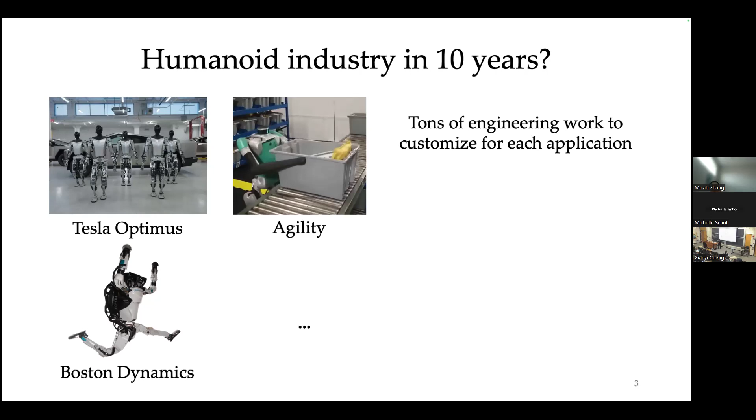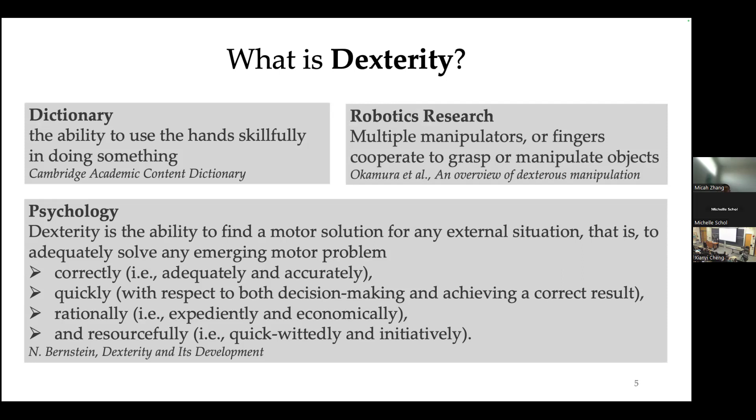So to me, dexterity is the autonomy in manipulation. Consider an analogy to autonomous driving, whose goal is to fully automate driving in cars, where it could encounter a lot of different emergent road problems. The goal for robot dexterity is this full autonomy in manipulation. But the autonomy in manipulation is going to be much more complex than autonomous driving, because thinking about our hands and arms, the action space is actually much higher dimensional compared to cars. And also, in manipulation we need to physically interact with the objects. In comparison, in autonomous driving there's no need to physically interact with, for example, a pedestrian.

But the potential of robot dexterity is not just about households. It's also about revolutionizing many different industries. There are a lot of manual processes in manufacturing, construction, warehouse, space operation, recycling, and so on. But right now, all these industries are having some labor shortage. So in this talk, I'll provide some new perspective on robot dexterity, and hopefully after this talk you'll be able to see more connections among these very seemingly different tasks.

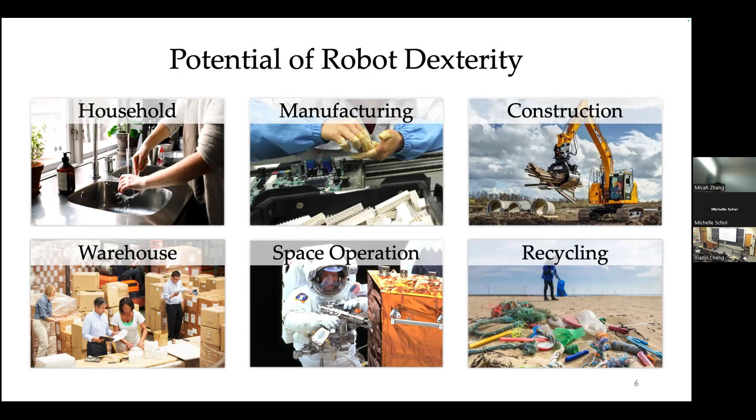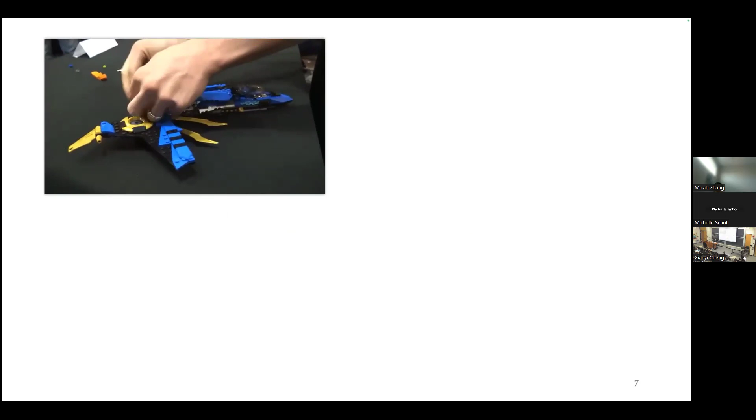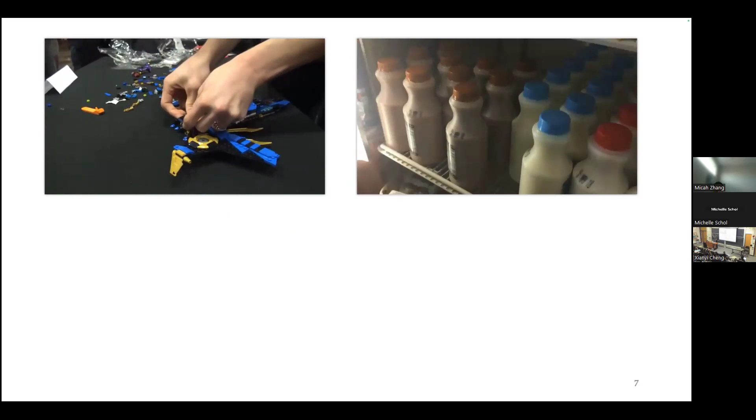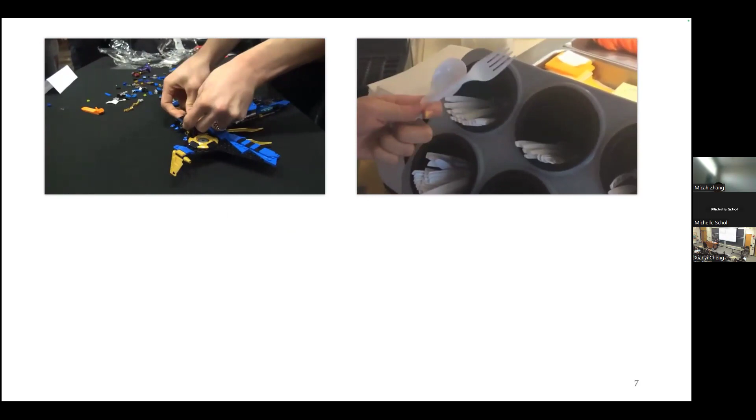So let's look into a bit more about human manipulation, human dexterity. Here you can see this person is very reactive, very fast, and very robust in manipulating these tiny objects. This is just a person trying to pick up items in the grocery store. You can see for these simple tasks, there are a lot of complex hand motions, a lot of complex object, hand, and environment interactions. This is just a single task.

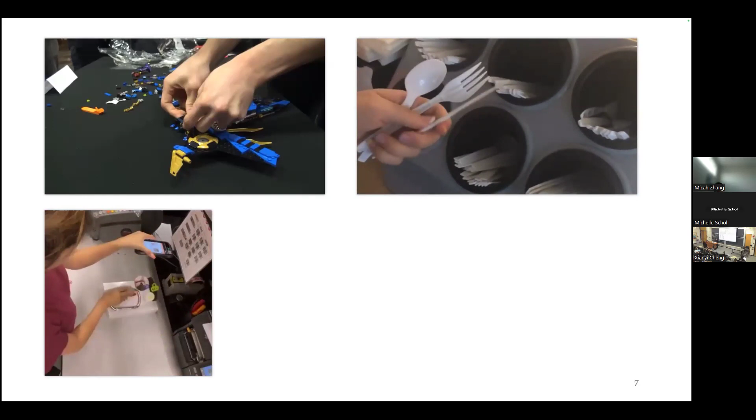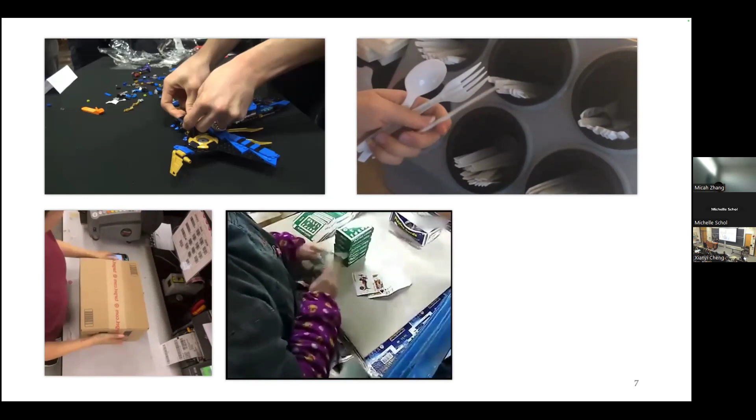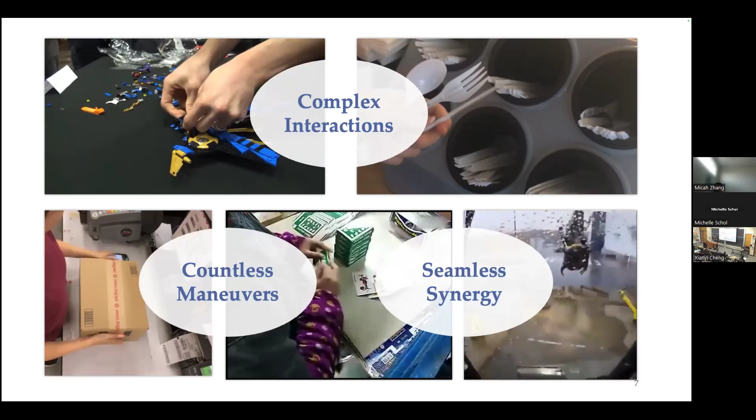So we can see a lot of complex interactions, countless maneuvers, and seamless synergy in human manipulation. In our robotics research, we only understand a very small part of dexterity. A lot of times we assume that we need to have a dexterous human-like hand, robot hands, in order to have dexterity.

I believe most of you have seen the OpenAI Rubik's Cube thing. So a lot of us believe that dexterity is about manipulating things within the hand. But if we look at these examples of human manipulation, from this excavator example, it's using a very simple tool to do very complex tasks. So dexterity is more from the intelligence inside the excavator, which is the human mind.

And from this packing example, we can see that it's not just about reorienting things within the hand. There must be more complex, smart strategies rather than in-hand reorientation.

So how do we move from our current understanding to this more general dexterity? I think it's important for us to answer more fundamental questions about dexterity. From my research, I'll provide some answers to the three questions below.

Our first question - I think the question is not as simple as it seems. I think it really encouraged us to reflect on what dexterity is truly about. So dexterity is not just limited to anthropomorphic hands. Even very simple end effectors can also have dexterity, like shown here from this excavator, from just very simple tweezers, or just from these chopsticks.

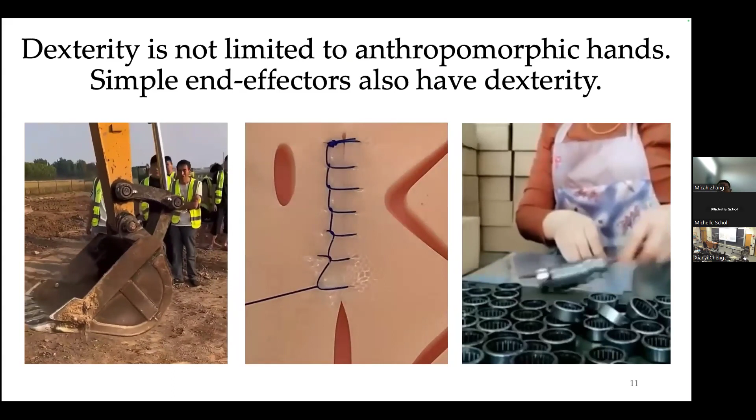So you may ask this question: why do we want robot dexterity beyond anthropomorphic hands? Why can't we just build human-like hands and let them do everything in different industries and in our households? I think the first point is that it's just like why we invent tools - we want to extend the physical capabilities of robots.

We want robot manipulation to have higher precision, to do heavy-duty tasks, or to even have better performance in scenarios that aren't naturally suitable for human hands. And we probably also want better cost efficiency. Human-like robot hands are extremely expensive and very hard to maintain.

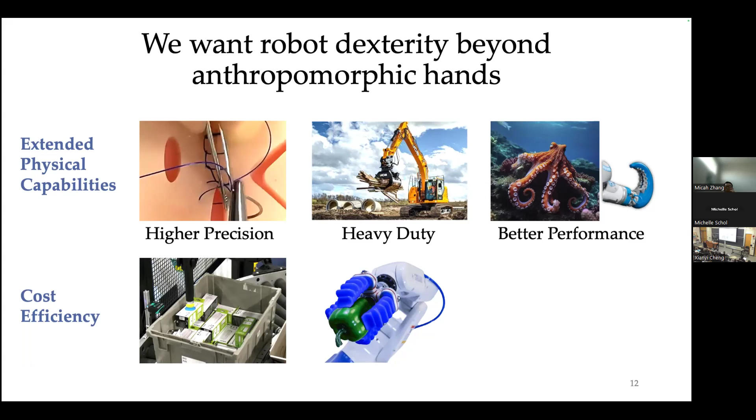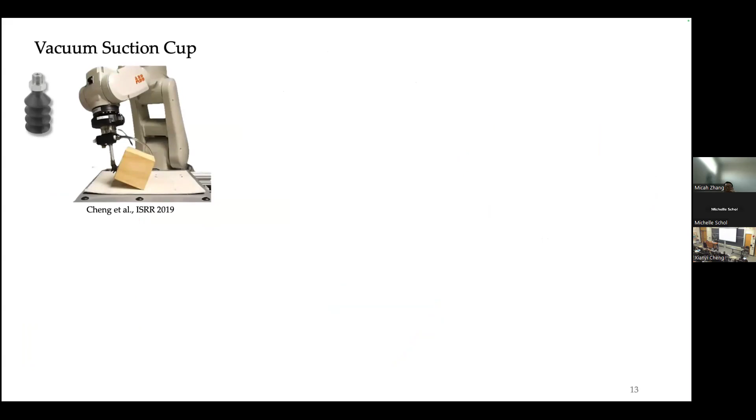But in industry, what we're using are suction cups or very cheap pneumatic robot hands. Imagine how much we can do by having dexterity in these simple end effectors, and how much we can save. So in my PhD research, I have demonstrated dexterity in several different robots: a vacuum suction cup, a rubber ball on a rod, a parallel gripper, a 4 degree-of-freedom direct drive hand.

This hand has 2 fingers, and each finger can move in X and Y. And also an array of delta robots - this is just an array of very small robots, and each robot can move in X, Y, Z, but their range of motion is very small, so they need to collaborate together to do any manipulation.

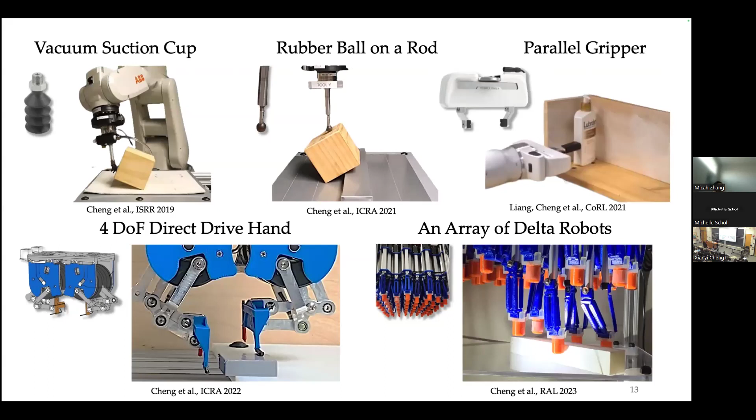So let's push things to the extreme and say, okay, the simplest robot end effector can have dexterity. This is a rubber ball on a rod, so it has 0 degrees of freedom. But I've demonstrated that it can also have some dexterity by pushing something onto the wall or getting an object through an obstacle.

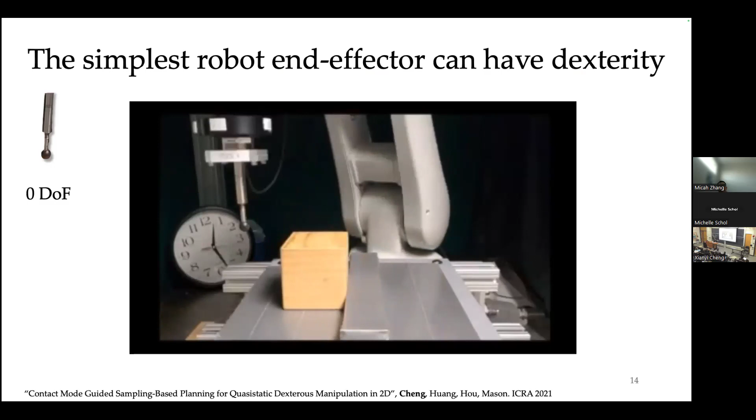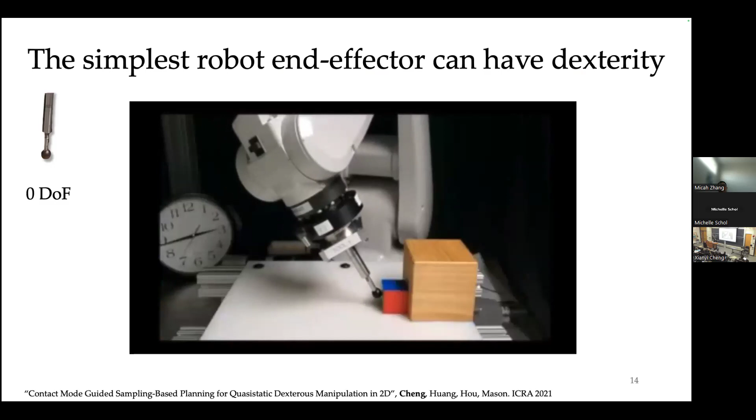And the next thing is that if we add some passive degree of freedom on the bellows and also some vacuum suction force, we get the simplest robot gripper that is mostly used for pick and place in industry.

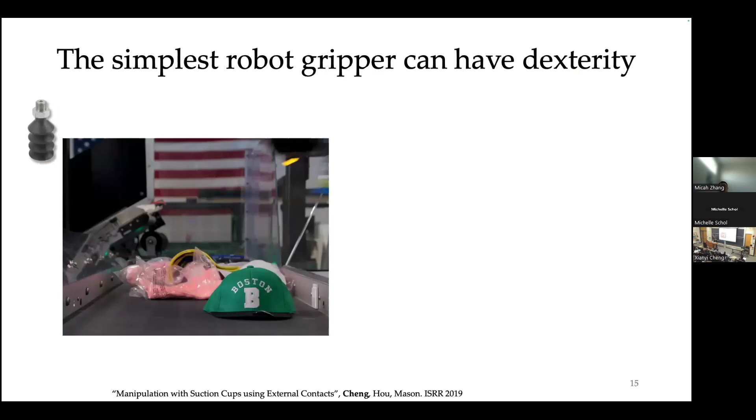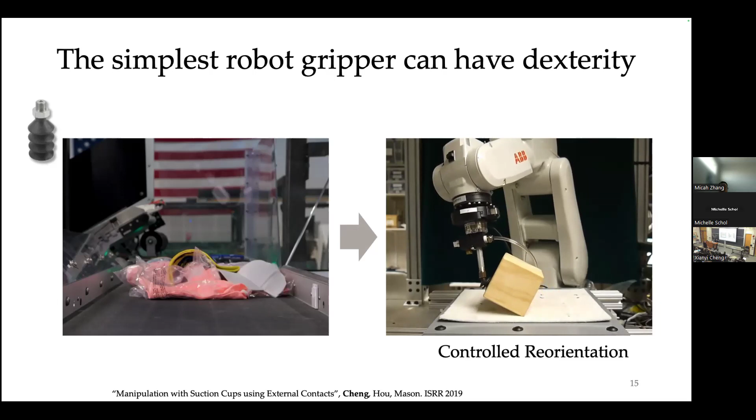But here I show that it can do controlled reorientation. In fact, for example, this object is too heavy to be picked up, but we can still tilt the block without picking it up with the help of table contacts. So it's really extending the robot's capability.

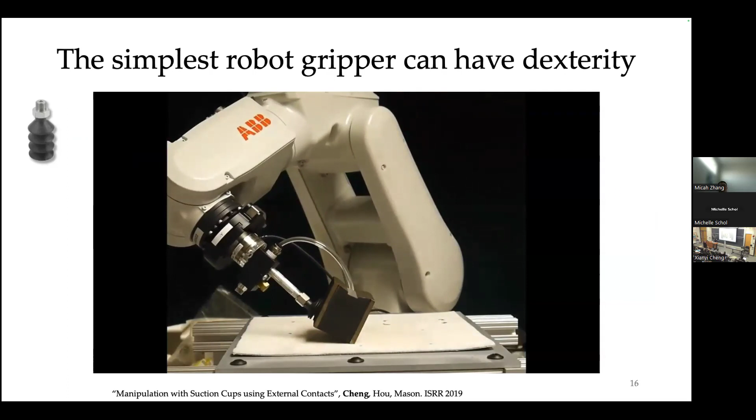I have also developed an optimal control pipeline where we can intentionally use the finger deformation to minimize the robot motions so that the robot will not go out of its workspace. So this is the dexterity for the simplest robot gripper, and we can imagine it having more future applications in industries like warehouse automation, where we can, for example, move and pivot things around in order to pack things.

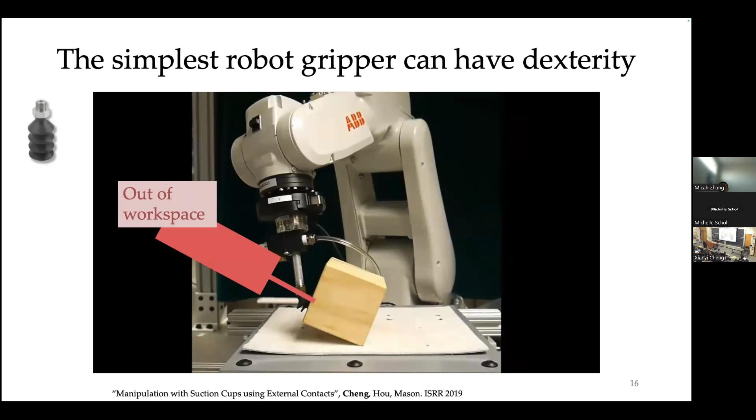And obviously, a slightly more complex robot hand can also have dexterity. This is the direct drive hand. This object cannot be directly picked up because of occlusion from the environment, but it can still have dexterous strategies, for example, first pivoting this object and then doing some dexterous finger maneuvers.

to grasp the object. And this is just a simple parallel jaw gripper. You can see this shelf environment is pretty occluded, but it's able to figure out a sequence of motions in order to get the object to its goal pose.

And also these small delta robots, they are able to collaborate together in order to reorient an object. I'm using the same algorithms to automatically generate the motions for these different robots, and I'll cover more technical details in question 3.

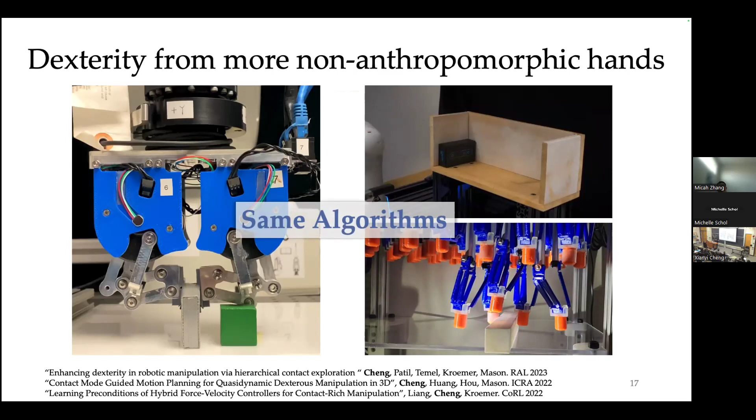So coming back to our question, what robots can have dexterity? My belief is that dexterity should be the motion intelligence that in the future all of our robots should have. I'm putting a question mark here because we cannot have any rigorous proof about that, but I want to use this as a thinking point: robot dexterity should be greater than human hand dexterity. It can be inspired by, but go beyond, human hand capability.

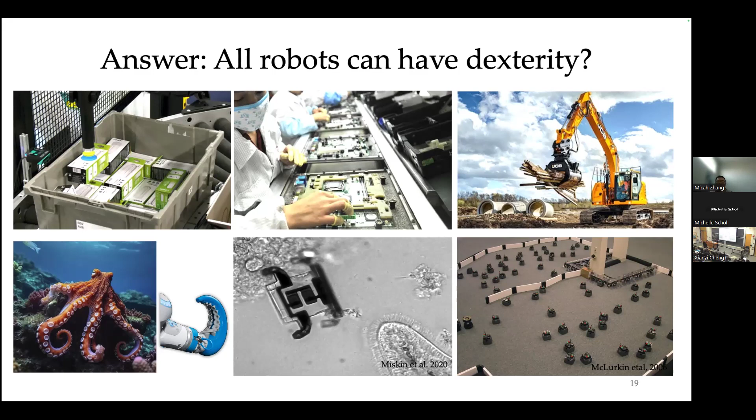If we want to enable all robots to have dexterity, then it must not be just about manipulating things within the hand, doing in-hand reorientation. So what should be considered beyond robot-object interactions?

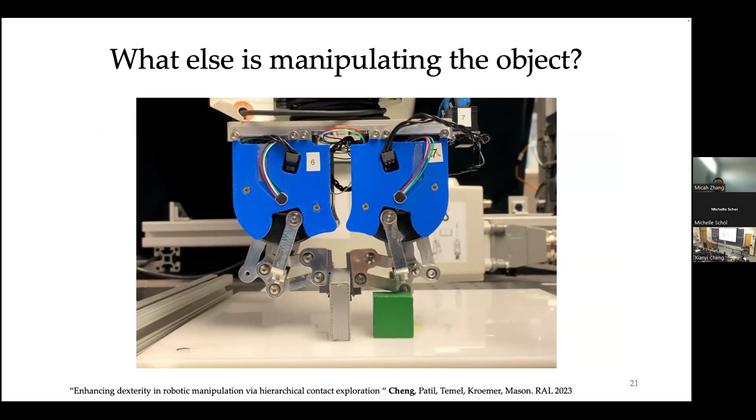We can call this the environment. It's actually very necessary for us to not just think about in-hand manipulation, but also consider the object-environment interaction in manipulation. So why is that?

The first thing is that the environment is the blocker for the robot. You can see that if the robot wants to grasp this block, it is actually occluded by this green block and this table, so it cannot achieve a direct grasp.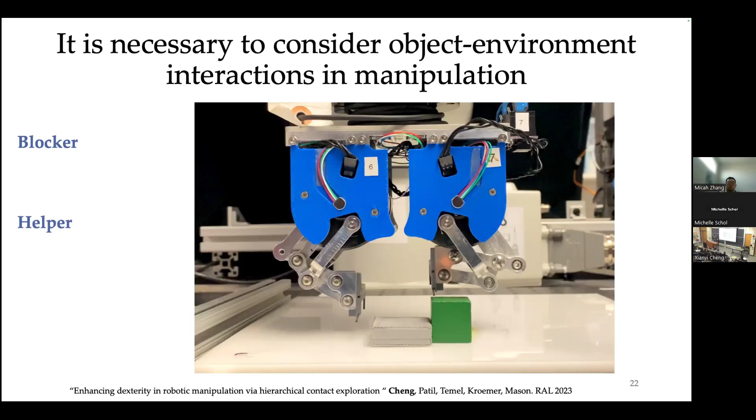And the environment can also be a helper. So for the blocker, the environment is the obstacle for the robot. But for the helper, the robot can actually use the environment in order to pivot this object, in order to achieve more dexterous, more clever motions to grasp the object.

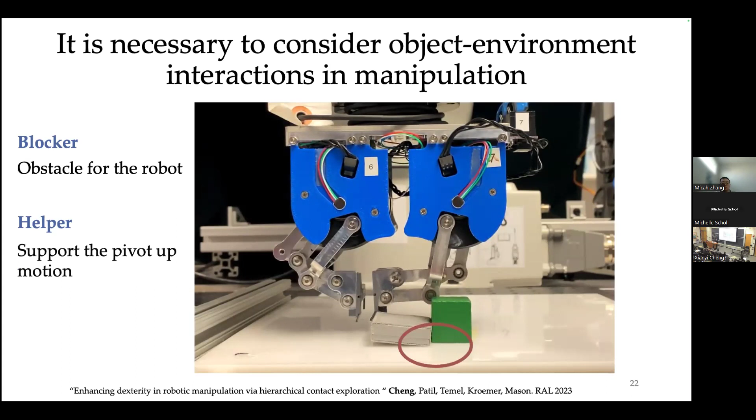So here are some more examples of this direct drive hand using the environment to achieve previously unachievable goals. For example, this bookshelf is obviously occluded, but it was able to figure out the pivot motion on the bookshelf and then rest it there and then grasp it. So you can see it's really using the environment.

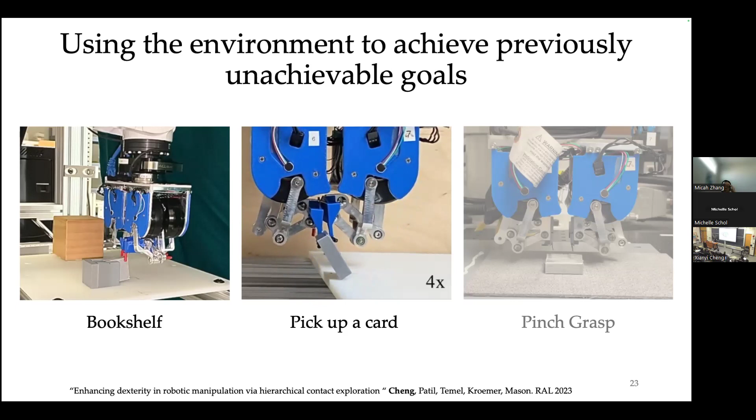And also pick up the card by sliding the object on the table first. And then this pinch grasp by first pivoting this object in order to grasp it on its short edges.

So to answer our second question, it is really important for us to consider the environment contact interactions of the object in order to achieve more general dexterous manipulation that's more than in-hand manipulation.

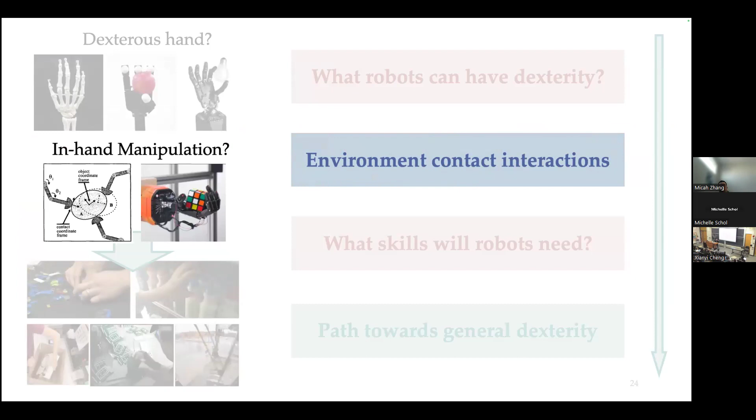So considering all these complex contact interactions and all these different robots, what skills will our robots need in order to capture dexterity, in order to capture that complexity?

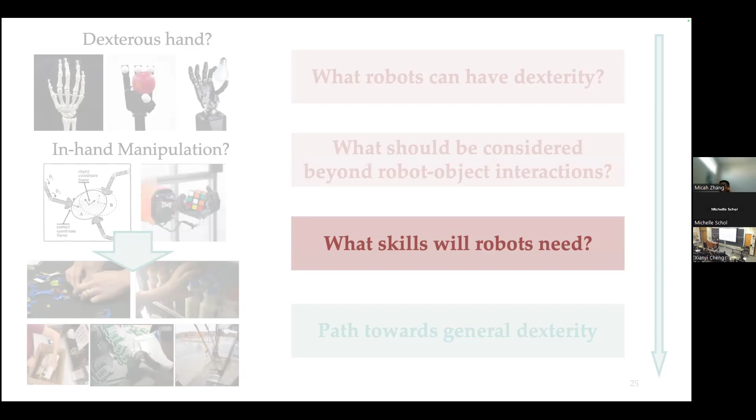Our first question is: can dexterity be fully captured by predefined skills? A lot of our robotics research considers that we can predefine different skills. They can be, for example, hard-coded, or they can also be learned from our observation of different trajectory shapes. Normally we can sequence them together in order to achieve a task. I think it's completely fine for many different tasks, but can that capture dexterity?

So we have several options. The first option is that we can probably predefine some high-level skills like pick and place, push, and pull, things like that. But here I'm going to show some videos for the picking skill.

So you can see that it's very, very different. The trajectory for each picking skill is going to be very different, and the contact interaction is also very different. So if we're defining high-level skills for dexterity, we still need to plan these dexterous motions within each skill, which actually does not fundamentally solve our problem.

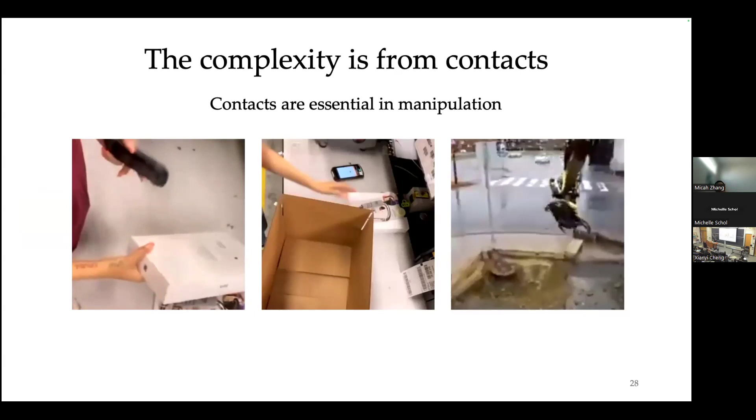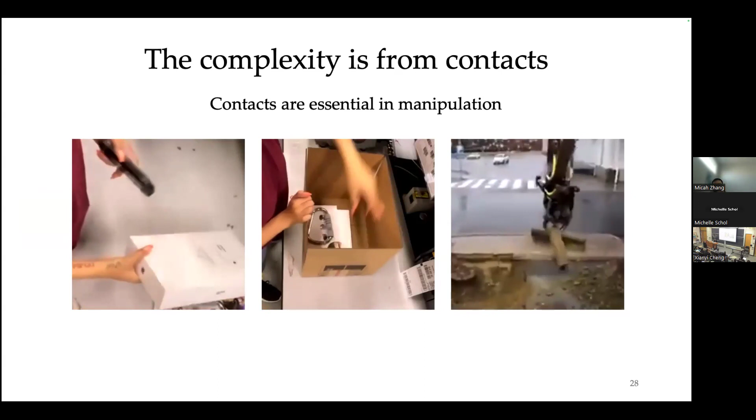If you look at these examples, you can see there are a lot of changes of contacts - object environment contacts, hand object contacts - and they are actually quite complex. The changes in these motion trajectories and the changes in the system dynamics are all caused by the changes of contacts. Imagine there are so many different ways for the hand, for the object and the environment to make contact with each other. There's perhaps this combinatorial explosion of these different ways of contacts, and that's causing these seemingly numerous low-level skills we have seen.

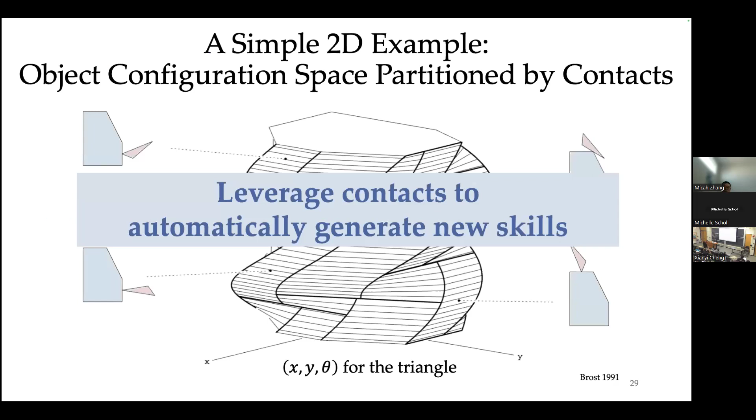But a nice thing is that a challenge could also be an opportunity. What I've done in those algorithms is leverage contacts to automatically generate new skills. A one-sentence summarization is that we use contact modes as auto-generated low-level skills. I'll explain what contact modes are in a second, but basically, by using these contact modes, we're looking at the local information for these small facets, and then use that local information to guide the generation of different skills.

So what is a contact mode? A contact mode basically describes the transition of the contact states in the system. For example, we have two contacts here marked by the black dots. Each contact can have the mode of separate, fixed, right slide, left slide. Here are some examples of the motions corresponding to different contact modes. These are not all the possible contact modes for the system, but you can see they already represent some diverse motions for the object.

Similarly, we can also have contact modes in 3D. It's slightly more complex, but we're essentially looking at the space for the contact velocity in order to distinguish the modes. In this video, the purple arrow is for the contacts that are separating, and the yellow arrows are for the contacts that are maintaining. You can see that they can actually represent pretty rich contact motions, rich object motions under different dynamics. This is also some contact modes for the hand and the object.

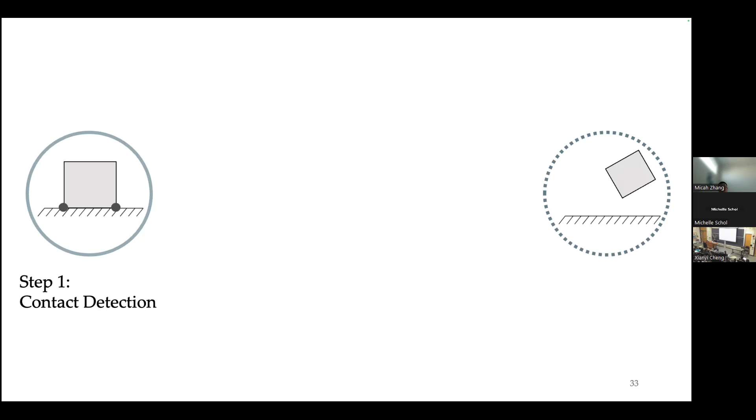After we've detected these contact points, we can do our contact mode enumeration and get all these different kinematically feasible contact modes. Then for each contact mode, we can sample a feasible robot action, in our case sampling robot-object contact points. Here's an example of sampling one contact point for a right slide. We'll do a feasibility check on the sampled points, and we'll see that in order for the object to slide to the right, we have to make contact on, for example, this area instead of that area. So we can do a force check to reject a lot of infeasible samplings.

And then, given the robot action, we can do something I call projected forward integration. It's basically about integrating the object motion as close to the desired sampled pose as possible. So this is for separate, and this is for the right slide, separate, fixed, separate. A lot of times you'll see that they cannot exactly get to the new pose, but still we can have diverse motions being generated using contact modes.

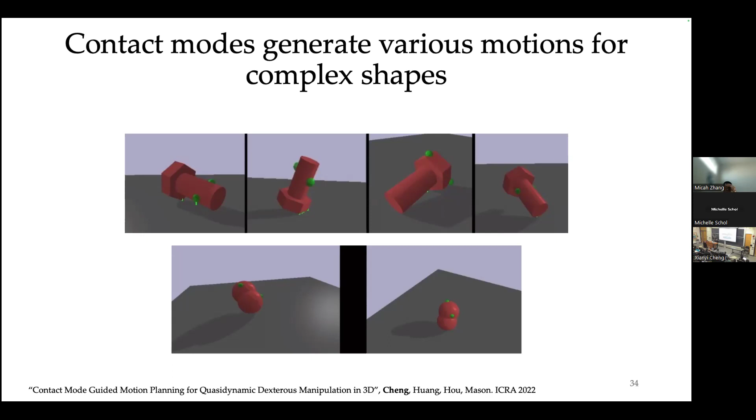So then we can combine these contact modes with the power of search and planning. We can combine these locally generated skills with contact modes with a more powerful global exploration, for example rapidly exploring random tree. Intuitively, it can randomly sample a new pose in the object configuration space, then use this random pose to find its nearest neighbor, and use these modes to generate many different skills. Some skills will be successful, some will not, but we can run this process iteratively to grow the tree and do the planning to get the object from its start pose to the goal pose.

Interestingly, we have proved that a 2D version of this random tree algorithm is probabilistically complete in our given problem scope. It means that for our given problem scope, the probability of not finding a solution to that dexterous manipulation problem will be close to zero as time goes to infinity.

Intuitively, it means that given our problem scope, we can use these contact modes to gradually explore the whole space of dexterous manipulation. One more thing to mention is that our problem scope for this proof is 2D manipulation and quasi-static manipulation with rigid body, with a single rigid body as the object.

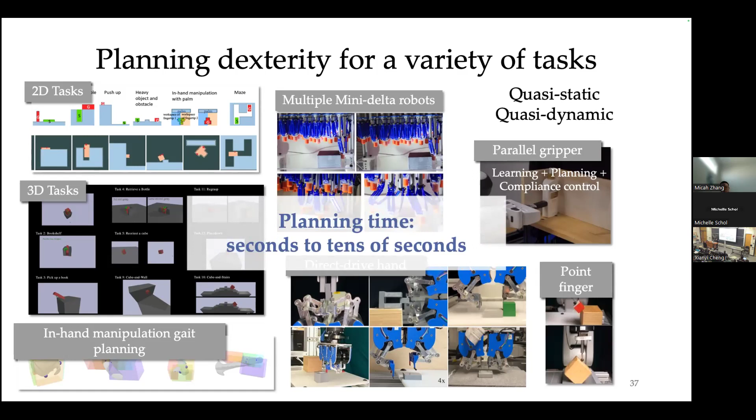I'm not able to show you all the videos for these planning tasks, but I'm going to share some of the most interesting takeaways from my experiments. First, although we don't have prior information about human manipulation, these planners can generate strategies similar to human manipulation. For example, for this unpacking task, a similar human strategy is sliding the object against the wall to get it up. Also with this bookshelf problem, this is a similar strategy to human manipulation, and also like picking up a book.

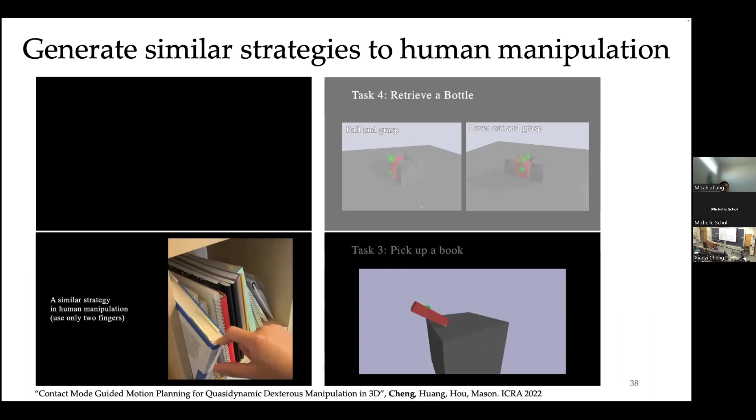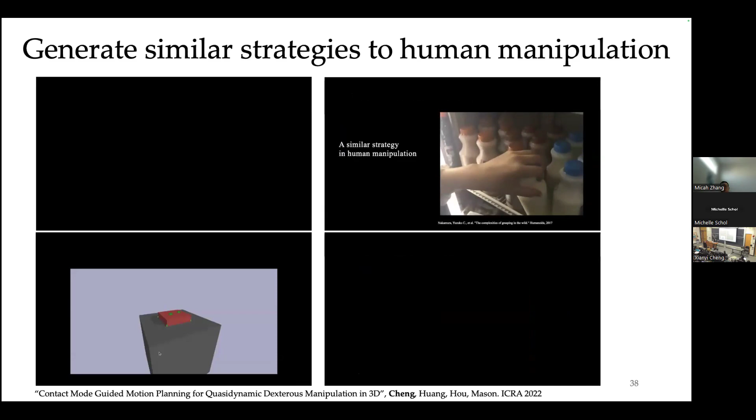Retrieving a bottle - that's the grocery experiment I've shown. I think environment contact guided manipulation is actually very common in human manipulation. By using this information about contact modes, we can have robots leverage the environment as an effective tool for manipulation.

There's also some smart strategies that are less commonly seen in human manipulation. Here's a quiz for the students: this is the upward peg-in-hole problem, where this is our start, this is the goal, and the green dots are finger contacts - we don't want the finger contacts to collide with the hole. So what would you do? Any thoughts?

Remove the hole? No, you cannot move the hole. The hole is fixed.

One thing is that if you release the finger, the peg will fall down. So how would you push that in? Slide - but if you slide it, you'll lose support on this side, right? Yeah, it's on the side. Bingo, I think both of your solutions are really good, it's just that we're not tackling dynamic manipulation yet, so this is my fault. But this is actually what the robot is doing, exactly as you just mentioned - but you can see the robot spent about 10 seconds to figure this out.

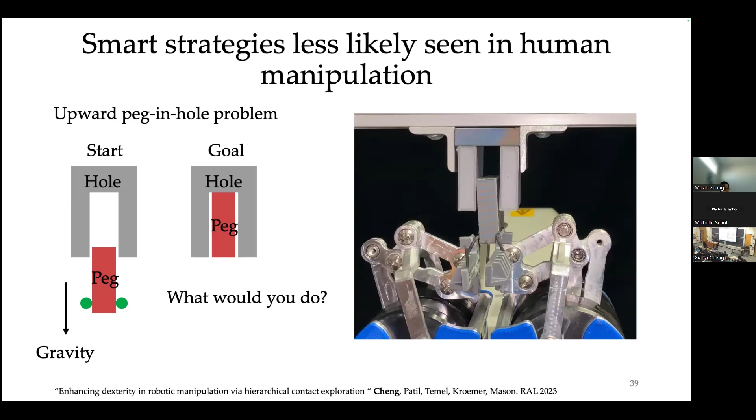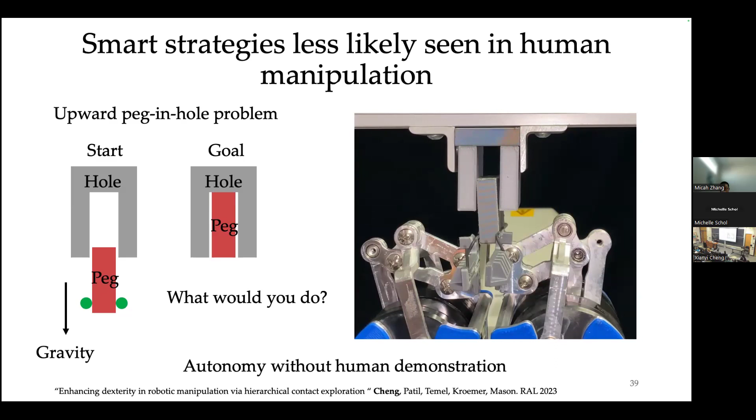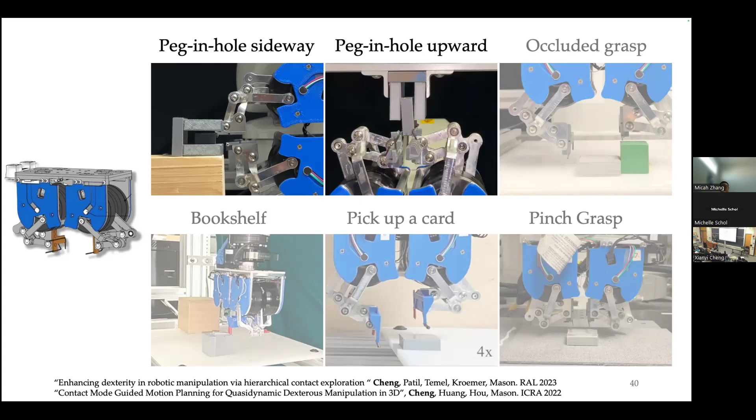We can definitely see that this scenario is less likely seen in human manipulation - even as humans we still need some time to figure this out. What I think this shows is some autonomy without human intervention or human demonstration. Here's the peg-in-hole sideways problem - you can see this time it does not need to press against the hole, it can just let it rest on the hole and on the other finger. All these experiments you've seen are generated using the information of contact modes.

There's also some robustness with force and compliance control - all these motions are executed with force and compliance control. So what is force and compliance control? Here we use hybrid force velocity control - basically, given a contact mode, it can figure out which directions you want to control velocity and which directions you want to control forces. In this example, the object could be slightly smaller or larger, or the surface slightly tilted, but because we're asking the robot to maintain force in this direction, with these types of uncertainties the robot is still able to maintain its forces and complete the motion.

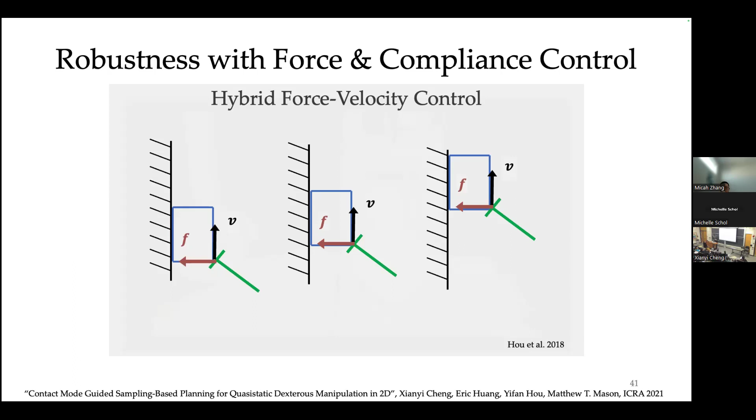I think what is really shown here is that with this indication of contact modes, we're not only having diversity in motion, but we can also obtain more robustness in this control by having force and compliance in our system.

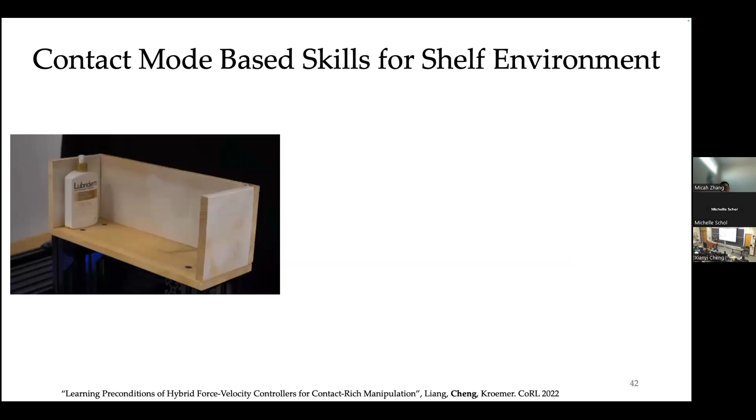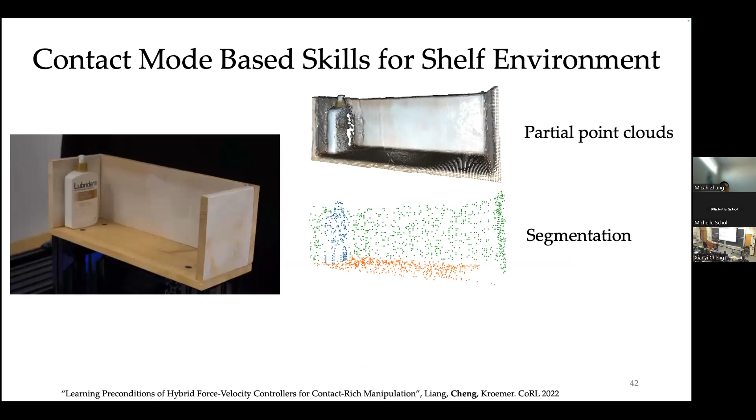In this case, it's not like previously where we have all the models. We have the robot, we have a camera observing the scene and getting partial point clouds, and then we do segmentation of the point clouds. You can see that it can be quite noisy and also partial information about these contact points.

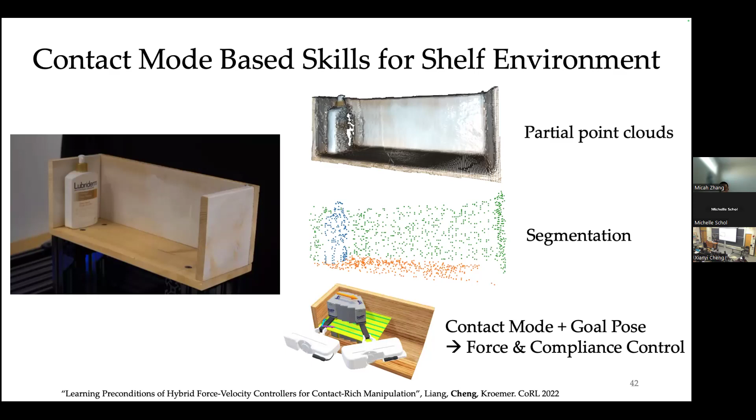But we can still use that to enumerate different contact modes. If we give a goal pose, we can feed that to force and compliance control, and it can do the execution. From that execution, we can collect data and then learn which parameter is more likely to be successful. So basically we have this planning, execution, learning, and planning loop.

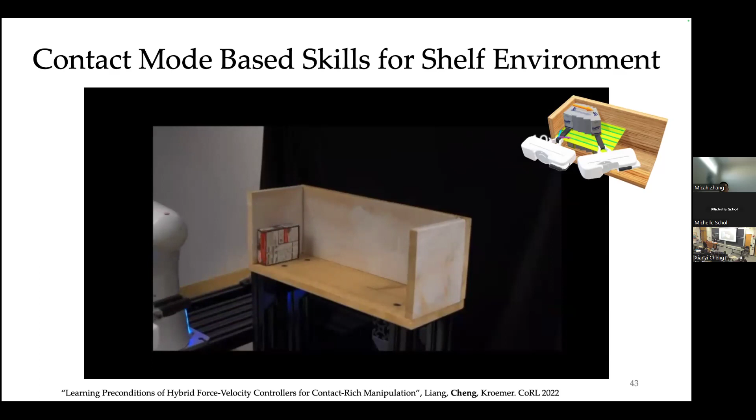You can see that even with this partial information, and also some uncertainty in the environment, it is still able to execute and generate different motions, diverse motions like sliding, pivoting up, and side pivot, and things like that.

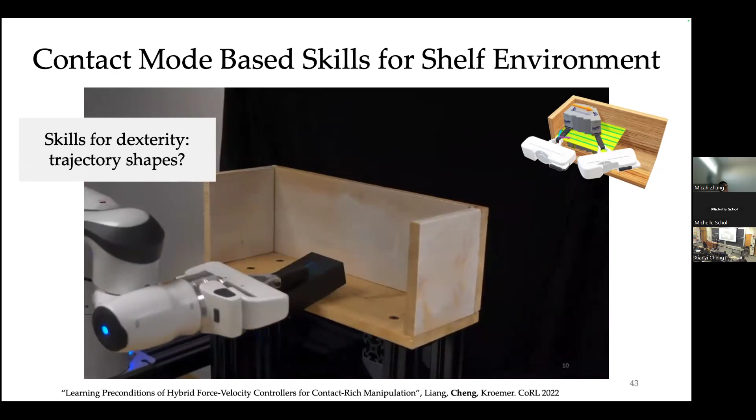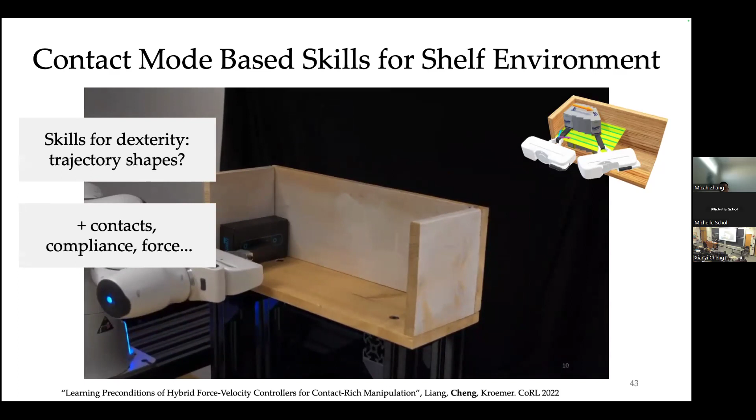I think the main takeaway is that when we're considering skills for dexterity, perhaps it's not just about trajectory shapes. As we can see, we use contact modes and force and compliance control. I think it would be really nice to have this information, for example, in our skill representation or in our data collection in our future work for dexterity.

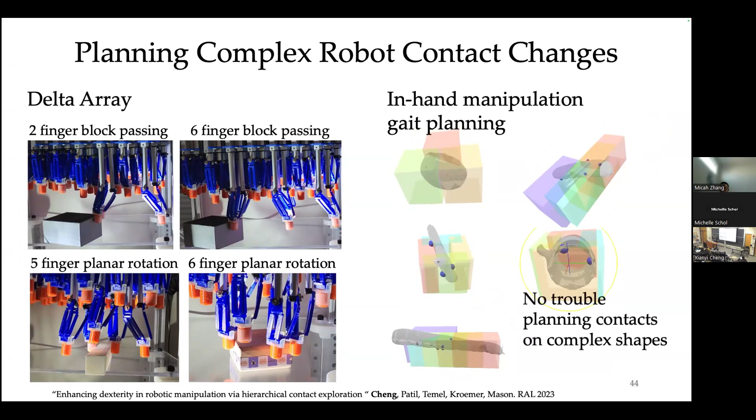So coming back to our third question: what skills does a robot need to achieve dexterity? Do we need predefined skills? Of course, I think we definitely need these predefined skills to, for example, make the planning time shorter and do some tasks more easily and smoothly. But it's still very important for us to be able to automatically generate these dexterous skills in order to deal with emergent situations for dexterous manipulation.

So here I show that we can generate new skills guided by contacts. I use contact modes, but if you think about contact modes, they're essentially a way to guide motion generation to let our motion generate on the lower dimensional manifolds of the original search space.

A broader implication of that is, for example, for more complex objects—right now I'm only focusing on a single rigid body. For more complex deformable or soft objects, articulated objects, or multi-object scenarios, it's probably not practical to consider all these different contact modes. Can we have something similar to figure out these lower dimensional manifolds? If we have a way to automatically identify these different modes, we can probably use very similar techniques to generate dexterous skills for these different objects.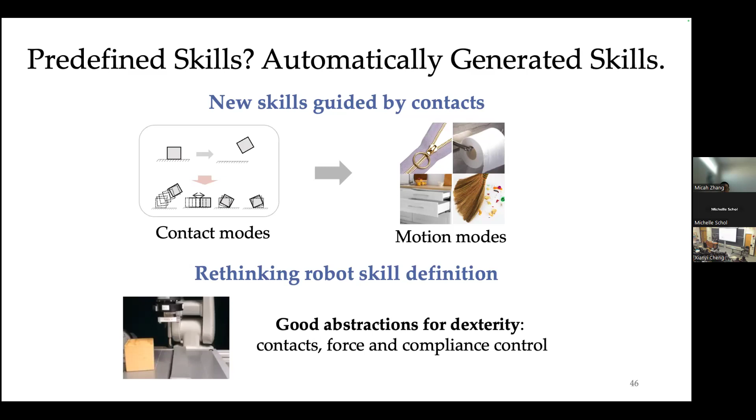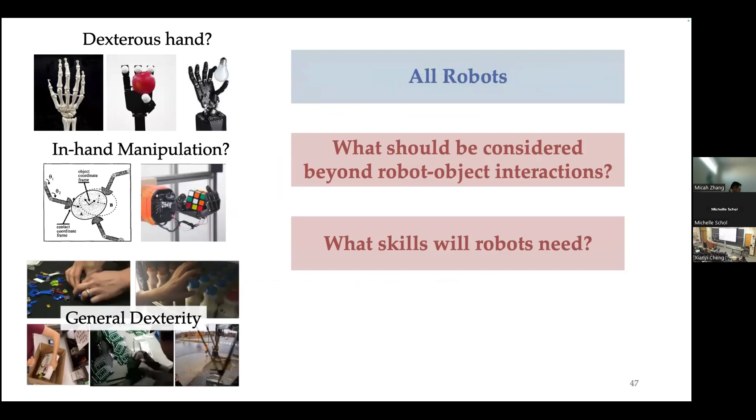So just a review of the 3 questions we have: I believe that all robots should have dexterity. It's important to consider environment contact interactions, and also to automatically generate new skills by using, for example, contact information.

Okay, so next I'm going to discuss the path towards general dexterity and also a little bit about my future work.

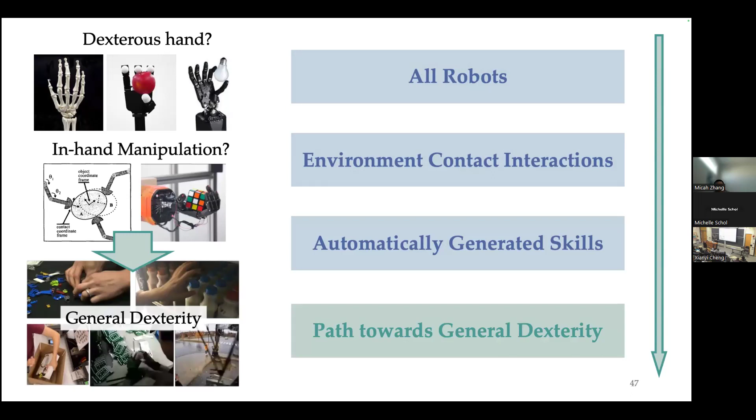If we believe all robots can be dexterous, I think it's a very good way for us to inspire new opportunities for new forms of dexterity in many different industries. Personally, I'm interested in, for example, how do we move from fingertip dexterity to whole body dexterity? In human manipulation, we can use our elbow to open a door, or when I'm playing with this thing, I'm actually using my palm contact and the segment of my fingers. Or when we're moving a large piece of furniture, we're using our chest and arm. So I think it will be very useful for our robots to have that type of whole body dexterity.

And also, inspired by these multiple delta robots, can we have multi-robot dexterity for a more general multi-robot system?

And finally, we have seen that we can actually use very simple end effectors to have dexterity. So can we discover more dexterity from using simple tools, very simple tools?

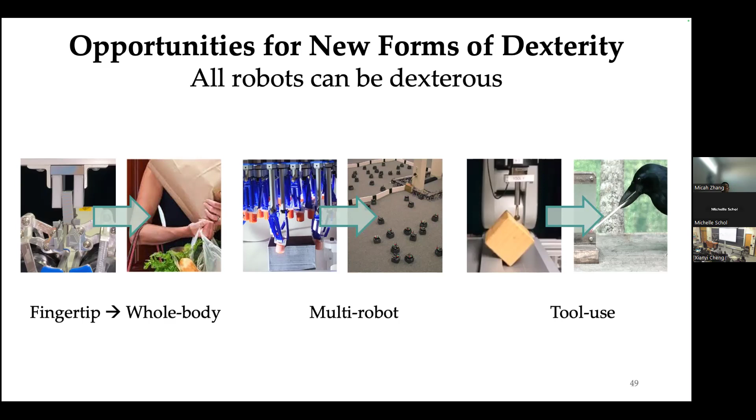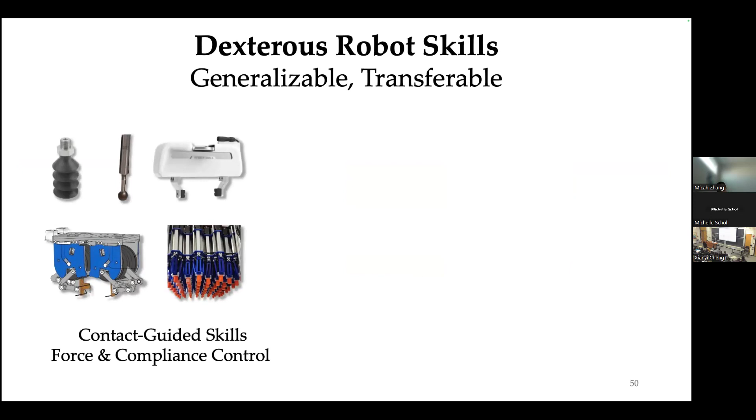The next thing is about how do we develop more general dexterous robot skills. We have observed that contact-guided skills and force and compliance control can be very good abstractions for these skills. But I think currently most robotics research focuses on collecting trajectory data, and collecting this type of robot data is extremely expensive. So what I'm actually thinking is that we can perhaps use our takeaways about contact and force and compliance control to augment, for example, more efficient learning from large-scale data.

And so that we can even have these skills be generalizable across tasks and transferable across robots. In the planner, it actually doesn't really make too much difference for us to plan for different robots, so they can be very good abstractions for learning more generalizable dexterous skills.

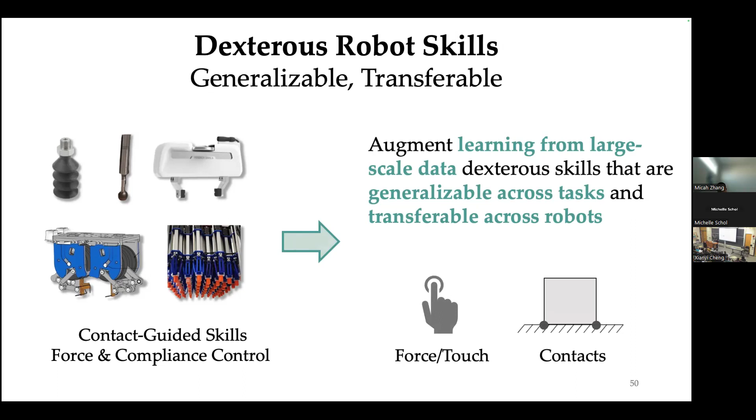Next, from my experience in different industries, I feel like our current robot infrastructure is actually not made for dexterity. Here in our lab, we've collaborated with a car part manufacturer. They have a lot of manual processes that still require human workers. Here's an example, the door latch assembly problem. You can see these parts are extremely small and they need to be assembled into this irregular shaped housing.

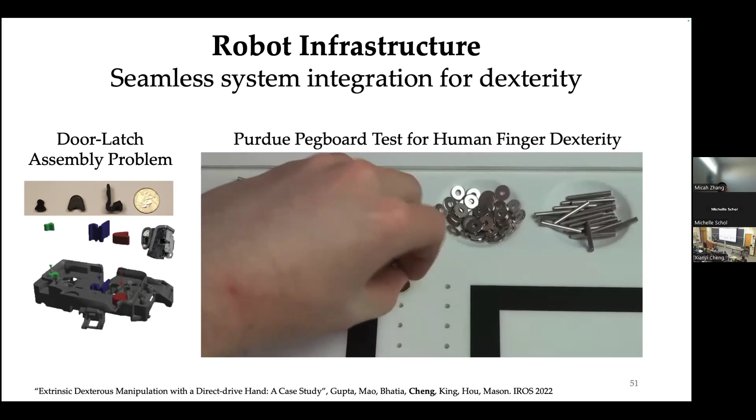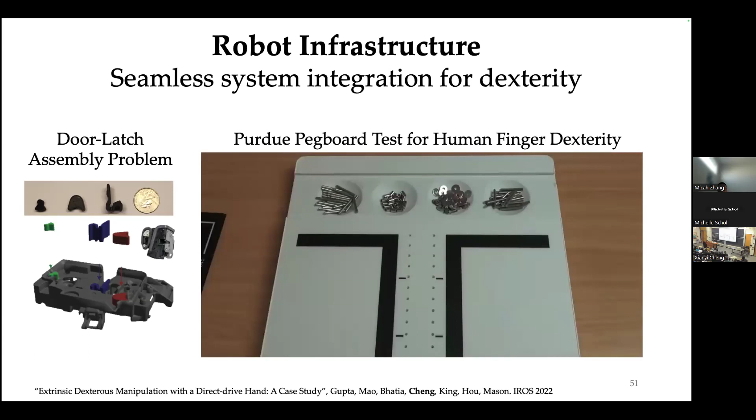Obviously our current robot system cannot do that, and we're facing a very similar problem in academia. There's a dexterity benchmark test for manipulation, but it's for human manipulation. So far I haven't really seen any general robot hands able to do these tasks, but if you know of any, I would really love to learn that. So our system is really not made for robot dexterity. This dexterous direct drive hand system has already demonstrated it can do many tasks that were not shown in previous literature.

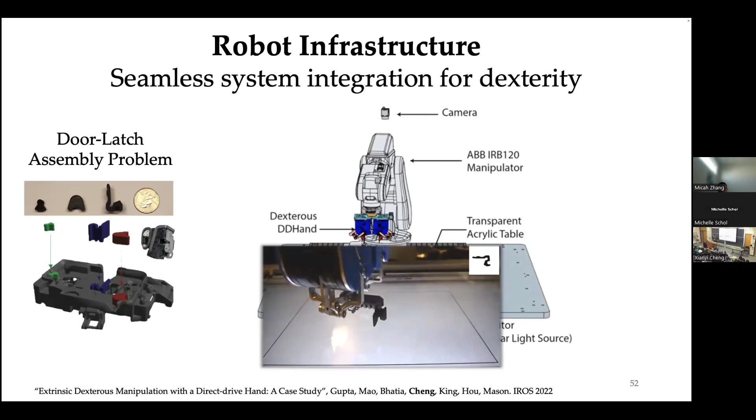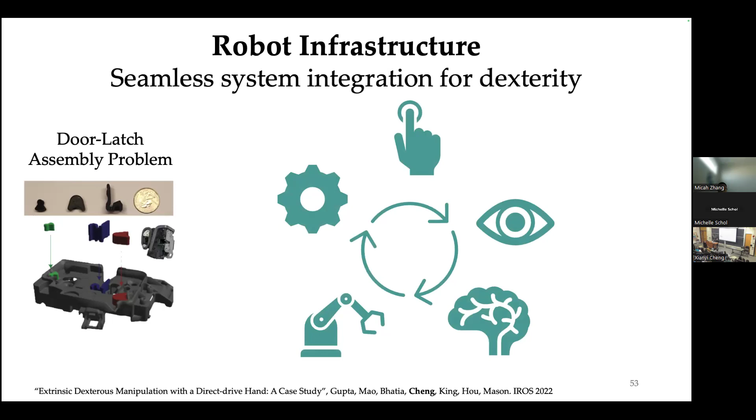Here I'm showing it trying to reorient these small parts into the pose that's ready for assembly. We haven't done the assembly yet, but it's trying to get it into position. In the future, I really hope - and I think this is a community effort - that we can build similar system integration for our robots to do more dexterous tasks in many different industries.

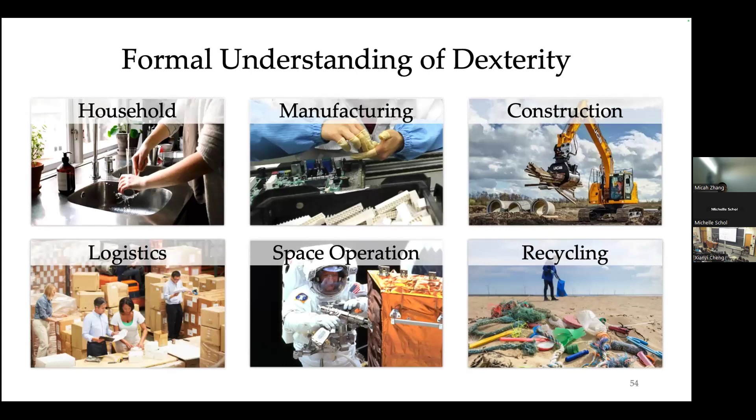Finally, I think we still have very little understanding about real dexterity. It's very important for us to study real world complexity, or even study human manipulation, motor control, build benchmark datasets, and figure out how we evaluate dexterity - how do we have a formal definition about dexterity? I think these are all very interesting problems for us.